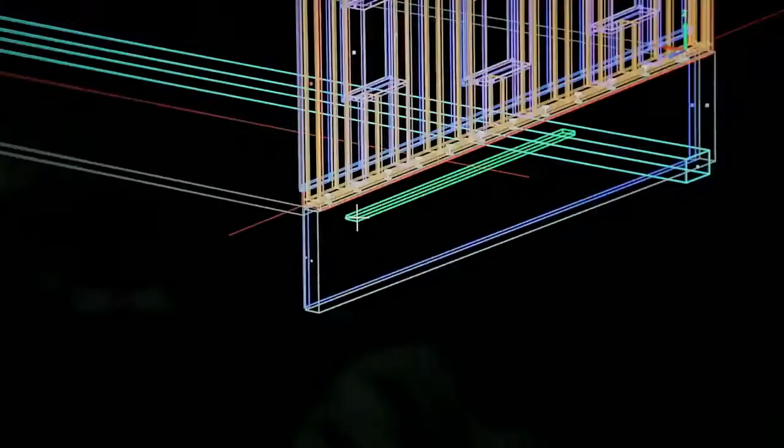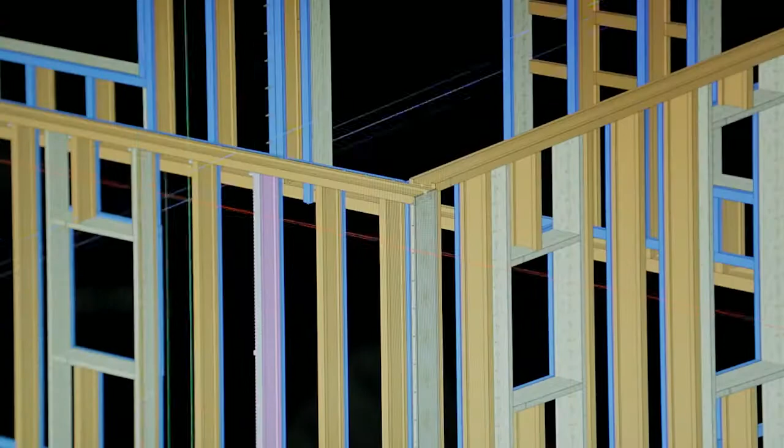Imagine if a home would still be around in 300 years. Imagine if designing and building a home was a life-affirming experience. Imagine if a home easily evolved and adapted as your life unfolds. Imagine if a home produced as much energy as it uses. Imagine if a home was all of this and just plain beautiful.

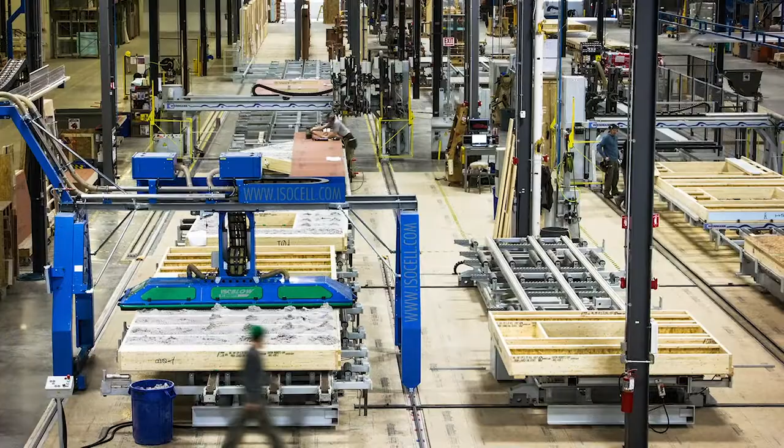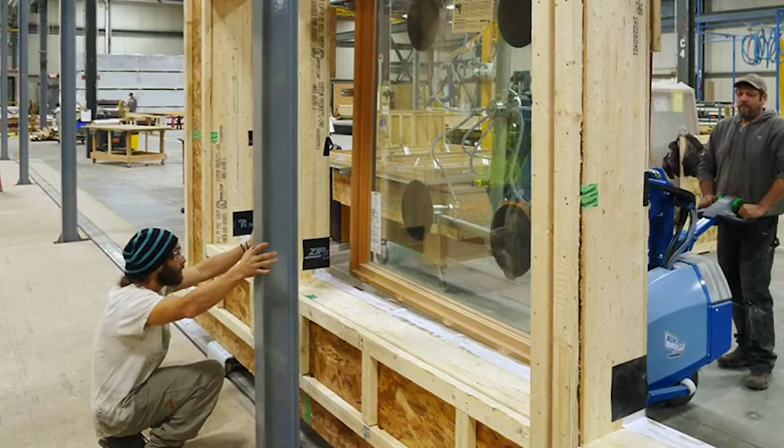That is Unity. Unity is a unique building system that includes technology, knowledge, a dedication to craftsmanship, and a dedication to building performance. It's uncompromised quality, and for us, quality is an objective, an ever higher standard.

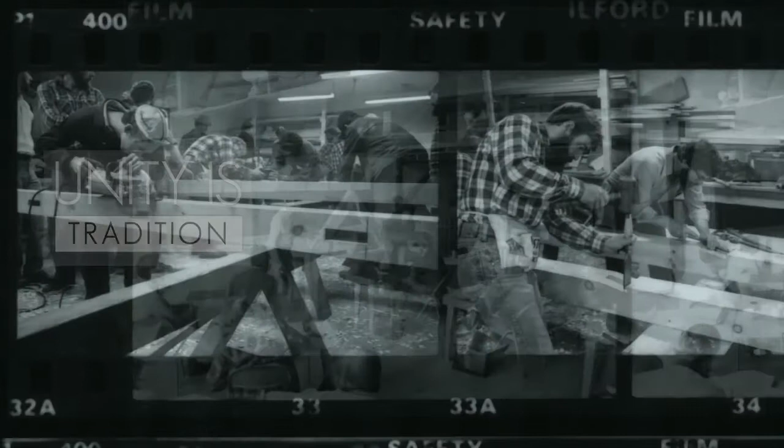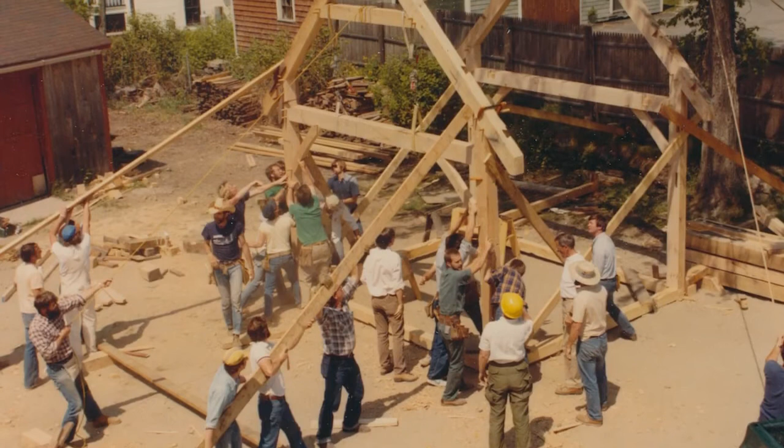In our early days, we were learning very much by ourselves. I could visit barns and old houses and learn a lot about how it was done way back when. Before long, we realized there wasn't much more to learn in this country, and there's a big world out there with better methods and better technology and better traditions of craftsmanship.

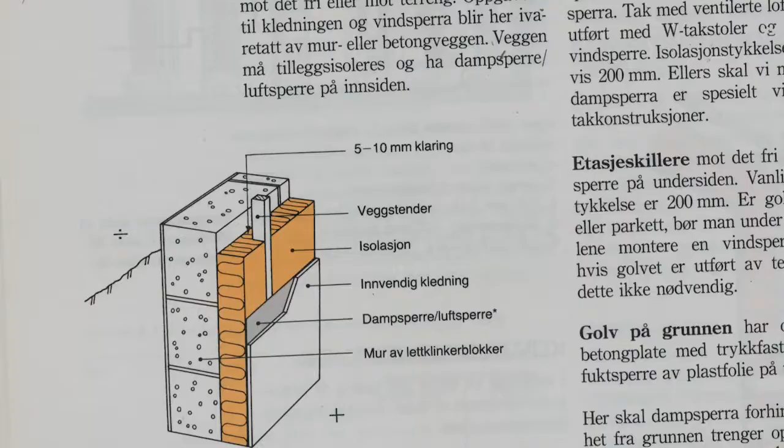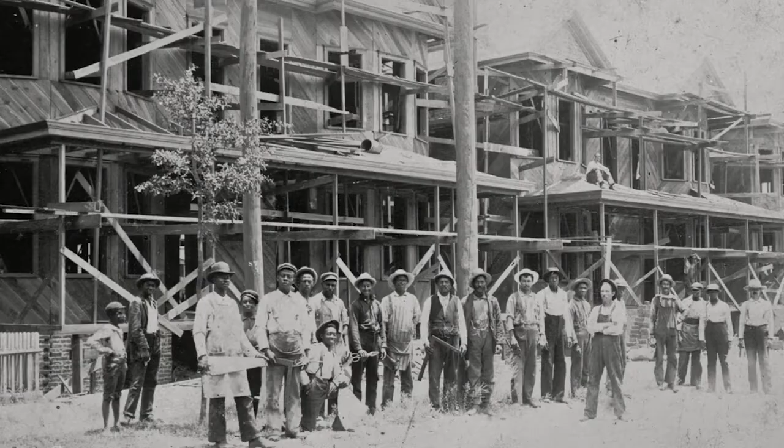So I went over to Germany and England, then France, then Scandinavia, then Japan. Building is a timeless craft, and we can stand on the shoulders of all the craftsmen and builders who perfected the trade hundreds and hundreds of years ago. We can learn from anywhere and from any time in history. That's the biggest strength of Unity.

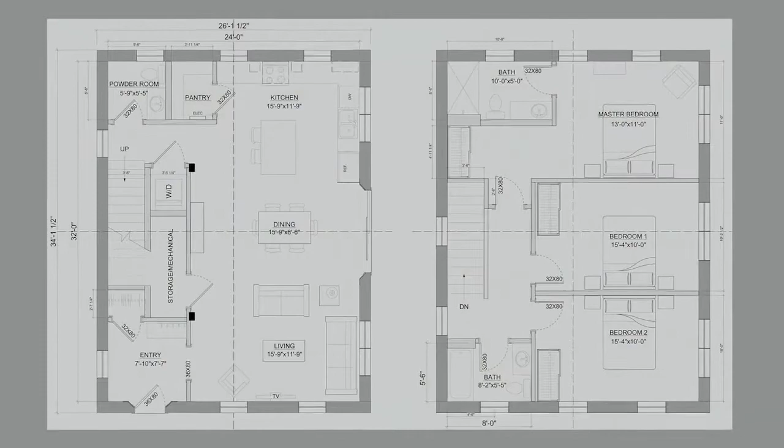We have developed a design system, what we call Montage. And we design on the grid, giving us patterns and geometry that are all repeatable. With computer technology, the result is a library of elements that can be dormers, bathrooms, kitchens, or stairways.

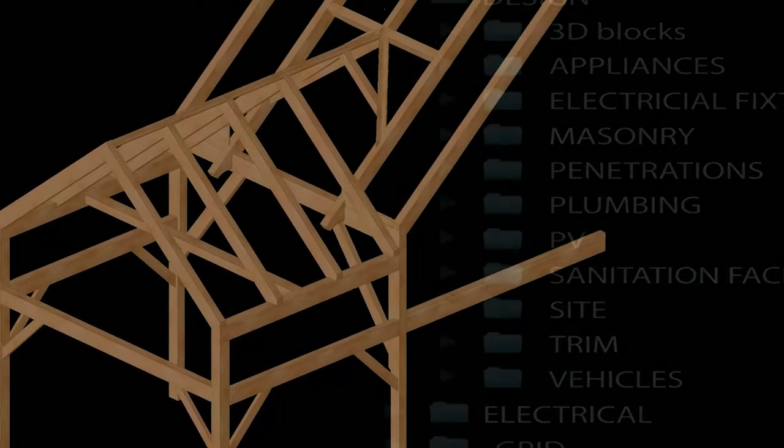The most important aspect of designing a home is that it comes from the clients themselves. They use the library elements in our platform to help us configure the building on their behalf. There's just a lot of decisions that can be made by the homeowners to achieve what is appropriate for themselves, their site, and their budget.

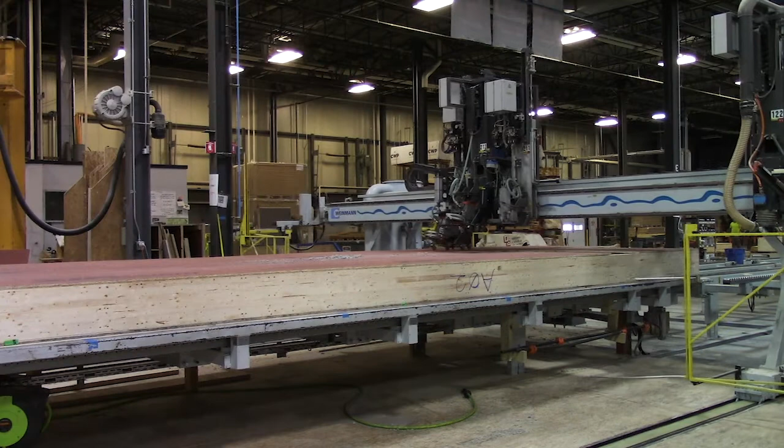The Montage design method gives us a new language to describe a better way to build. All of our buildings employ open building practices, the most advanced building science and building techniques, and a method of creating structural elements off-site where building conditions are controlled so that the outcome can be controlled.

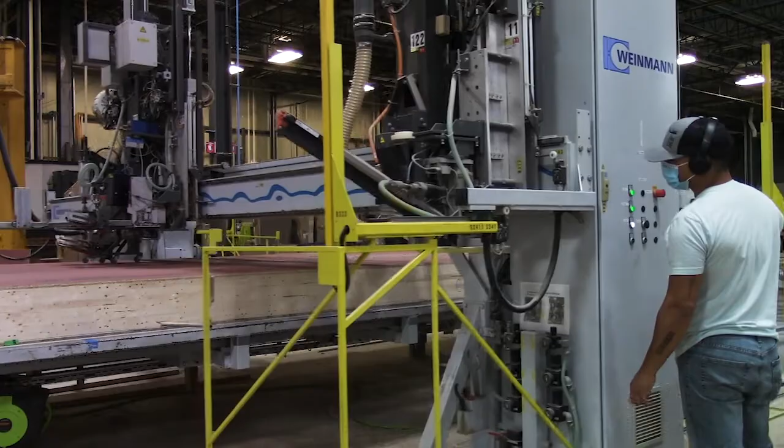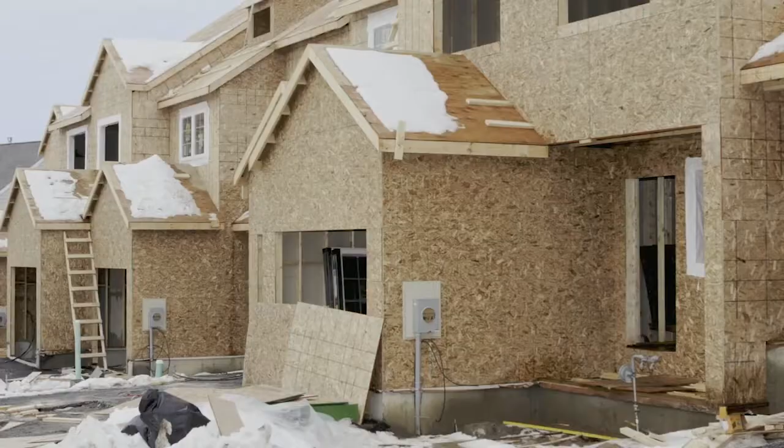Remember, a stick-built home is built on a construction site and is subject to variable conditions of weather and terrain. And when you include the nails and every stick of wood and every sheet of plywood, it easily gets up to 50,000 parts and pieces that go into a building.

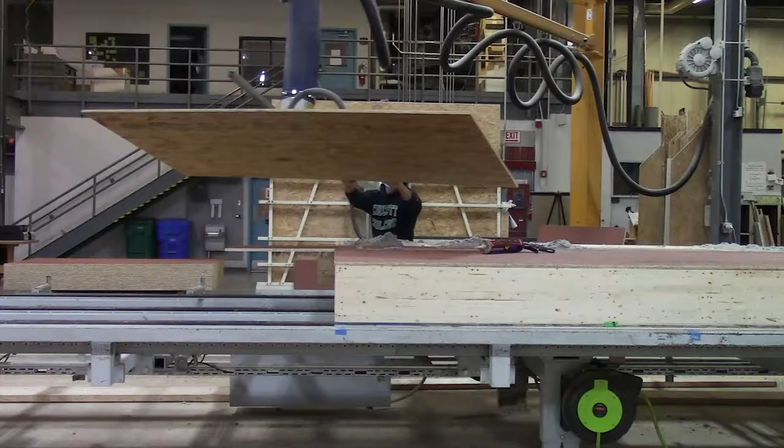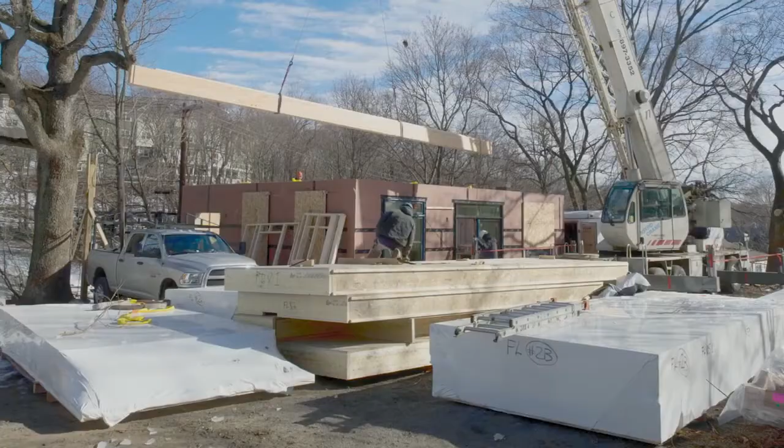When we off-site create a building, we aggregate all of those parts and pieces into fewer elements, 40, 50, 70 elements that are then assembled much more quickly and without the concerns about the variable site conditions. We are really using off-site as a way to keep a very, very high standard.

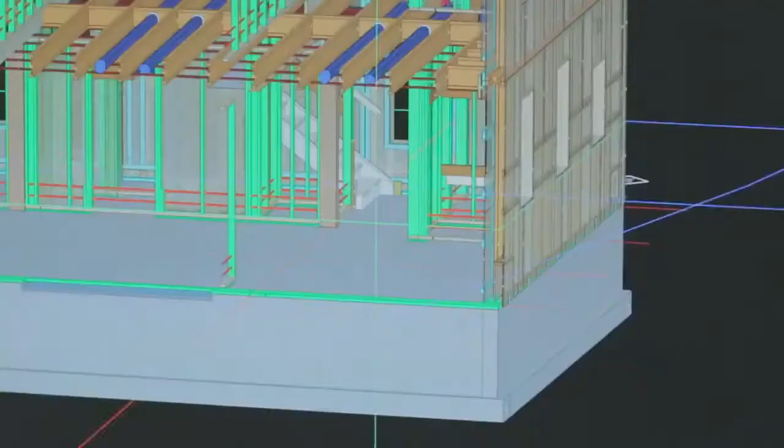Home building is a service to society. We believe strongly that homes have the opportunity to deeply impact people's lives. Home is a place that is secure, comfortable, energy efficient, dependable, and durable. It can happen quickly. It can happen correctly. That is Unity.